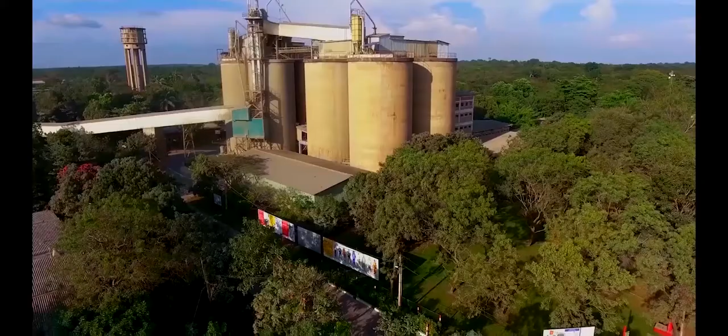INSEE is a proud member of the Siam City Cement Group Public Limited, a leading cement manufacturer in Southeast Asia. The Siam City Cement Group provides world-class construction materials to a host of countries around the world.

This includes Cambodia, Bangladesh, Vietnam, Thailand, Indonesia and Sri Lanka. With a plethora of landmarks and buildings that define the skylines of these countries, the Siam City Cement Group pledges to be a role model in corporate governance and sustainable development.

INSEE Cement, Sri Lanka's premier cement manufacturer, is the brand behind our country's leading cement products and the driving force behind making Sri Lanka more sustainable.

With a reputation built on outstanding performance in the quality of our products, unparalleled customer service, the dedication of our employees, our respect for the communities in which we operate, and our ambition to set the standards for the industry of tomorrow, we have contributed to the growth of Sri Lanka with iconic developments across the island.

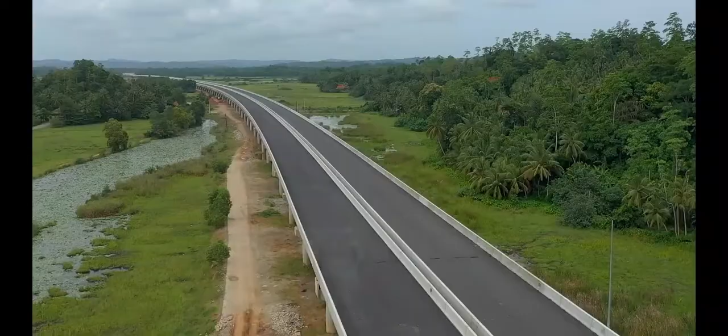Just to name a few: the Lotus Tower, Altair Residencies, the Colombo South Harbour, Southern Expressway, Mattala Airport, the Kalladi Bridge, the Kotelawala Defence University, Mahinda Rajapaksha International Cricket Stadium.

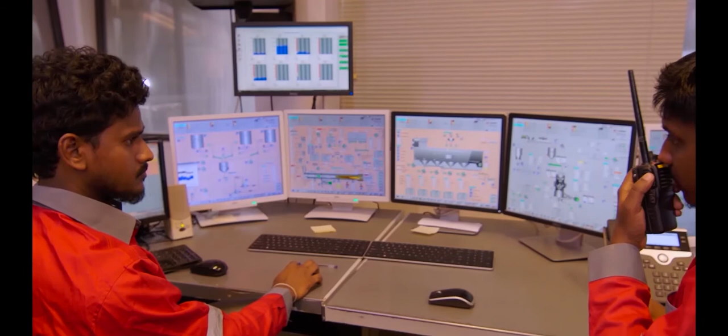INSEE has cemented its position as the most preferred local manufacturer of cement in Sri Lanka, with its widespread distribution network comprised of over 7,000 dealers in the retail segment located island-wide. Today, we have 2 plants in Puttalam and Galle and 2 terminals in Galle and Colombo.

INSEE's Sunstar brand is Sri Lanka's first cement product to be awarded the Green Labelling certification by the Green Building Council and was the first blended cement to launch in Sri Lanka.

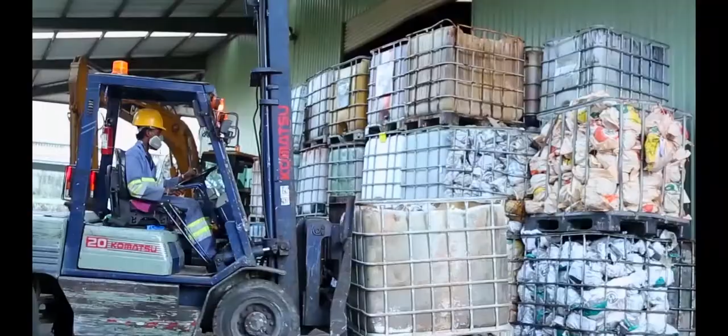INSEE has a wide portfolio of cements and services to suit all your construction needs. The most popular among them: INSEE Sunstar, INSEE Mahaweli Marine Plus, INSEE Extra for mass pouring concrete, INSEE Rapid Flow Plus, INSEE EcoCycle, INSEE Concrete, Conwood by INSEE, and a state-of-the-art innovation and development facility.

Having been a part of Sri Lanka for almost a decade, we will continue to build on our long heritage of shared loyalty, creating trusting relationships with our business partners, people and community, and delivering our promise of building the nation.

Today's session, as Dishan said, is about the new SLS 1697 Portland composite cement.

And the third thing is that today Switzerland is playing the quarter-final against Spain, such a small country. Thanks to discipline, thanks to motivation, they could do it. That is exactly the same when it comes to innovation. When we have the right ingredients, as in Sri Lanka, impossible is nothing for us.

That is why I'm really grateful to have this opportunity to present you the new SLS standard on Portland composite cement.

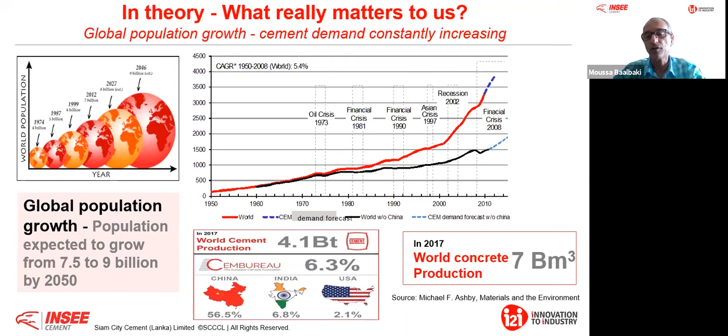But today there is huge pressure in terms of carbon footprint, I will come back to that. Looking at world concrete production in 2017, it was around 7 billion cubic meters. Sri Lanka alone is around 12 million cubic meters poured last year. There is really intensive use of cement and concrete to sustain development in every country, including Sri Lanka.

It is important to mention that cement is the third largest CO2 emitter after fossil fuel and land use. The cement industry alone contributes to almost 8% of global CO2 emissions and climate change.

This is really tremendous. When we look at the embodied carbon of building products and construction, they are responsible for 11% of global greenhouse gas emissions, and 28% of the global building sector emissions. The footprint is quite impressive.

Eliminating this emission is key to addressing climate change and meeting the Paris Climate Agreement target that Sri Lanka has signed. For every ton of OPC, we are emitting around 0.8 to 1 ton of CO2, so the footprint is quite high.

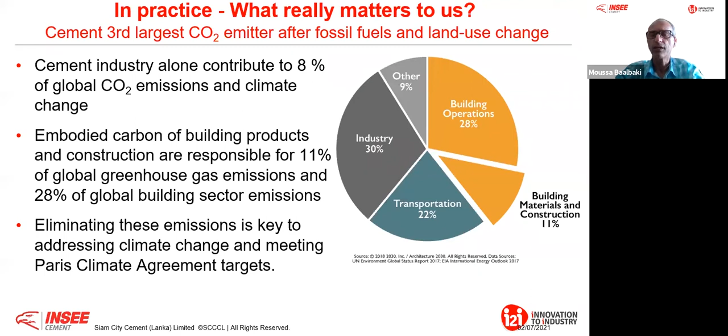But what is also important to mention is that embodied CO2, compared to operational carbon emission, is very important here, because it is locked in place as soon as a building is built. We have to address this.

When we talk about operational carbon, we see today solutions during the use phase of a building, using more green energy, non-fossil energy, electricity coming from solar and wind. There is a lot of improvement there.

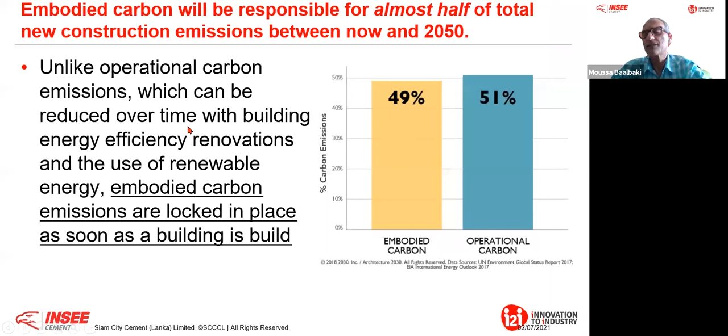But when it comes to embodied CO2, it is very important that we look at the product as it is during production, mainly cement. If we do not achieve a 65% reduction in total global emissions by 2030, we will have lost the opportunity to meet the 1.5 to 2 degree threshold for climate change. That will be irreversible, so we have to really look at this.

That is why most of the big cement player companies, even in our region, have already committed to 2030 and 2050 roadmaps for CO2 reduction. We need to have an immediate focus on embodied carbon reduction.

How do we do this? Through circular economy and innovative greener products. We move totally out of the linear economy to the circular economy, looking after any byproduct and integrating it into solution development, along with carbon capture and usage, carbon sequestration, and alternatives to fossil fuel.

For example, when we produce in Puttalam, we use alternative fuel, but we can also use solar energy and wind energy to reduce the footprint. There are solutions, but the most effective one is to reduce the clinker factor of the product, because clinker emits more than 60% of the total CO2 per ton of cement. That is really important to look at.

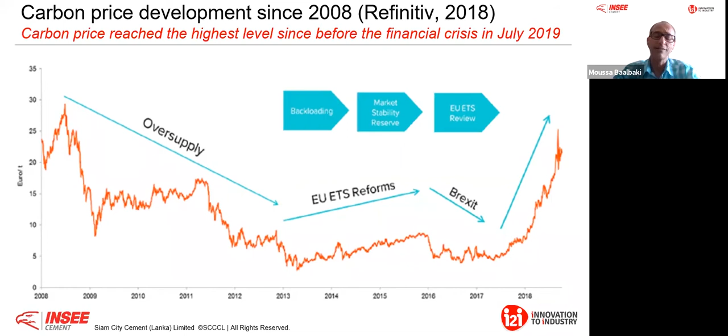Therefore, that is something that we just cannot afford. That is why we need to prepare. We have a good roadmap. We need to prepare ourselves in order to stay competitive and try as much as possible to develop solution technology, even proven technology that has been used elsewhere, and try to bring it to Sri Lanka. That is very important, and it's also a good incentive for the Lanka cement producers to invest, develop innovation, and develop the next generation to take over these challenges and turn them into opportunities for Sri Lanka, as several countries have already started.

Now, the second challenge that really matters to us is the trend toward urbanization. We say population growth, we need to build more, but when you talk about urbanization and mega cities, we build differently. We are not building only horizontally, but vertically, and even underground today. Therefore, the technique of construction and engineering properties are changing, because we are getting closer to coastal areas. People develop more, especially on an island, we need to be close to the sea. This has another impact, because we have to consider the new engineering properties requested to assure that we build in a sustainable way.

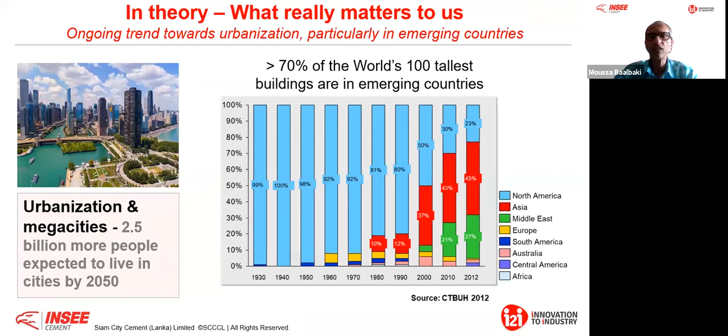For example, if I look at tall buildings built vertically over the last 50 years, more than 95% were built in North America. Today, more than 70% to even 80% of the world's 100 tallest buildings are in emerging countries, meaning Asia and Middle East countries. This is why we build so much vertically, and this has an impact in terms of technique and solution development to assure that we can fulfill engineering properties. For example, when we talk about e-modulus for tall buildings, or durability for infrastructure that needs to be built now for 50 to 100 years, these aspects are not linked to compressive strength alone. There are other properties, and that will have an impact.

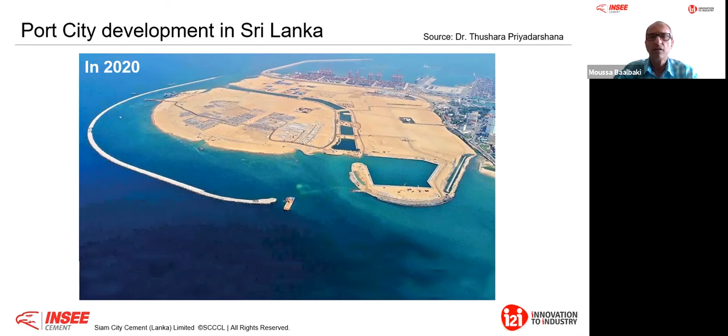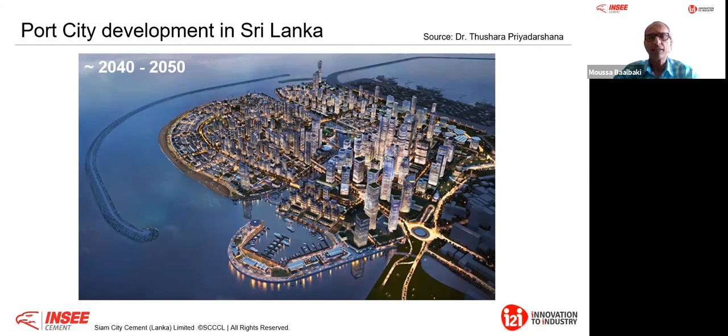Therefore, we are really challenged by supply chain and raw material. We cannot miss any opportunity to assure that we can build in a sustainable way. When I say sustainable, we build with very low social cost. That is important, because we talk a lot about concrete being the universal construction material, but also a possible universal construction problem. You have all been listening to the news. We don't want this to happen to us.

The Morandi bridge in Genoa, Italy, 2018, and in 2020 again another bridge in Italy. I don't want to show the picture of the last building collapse facing the Atlantic Sea in Miami, because they haven't finished investigating it, and out of respect for the families involved I decided not to show this picture. But here again, if we build and do not consider parameters other than compressive strength that are directly linked to exposure conditions, something could turn against our benefit. That is why it is very important that we look at this. There are opportunities, there are solutions, and this is what I would like to share next.

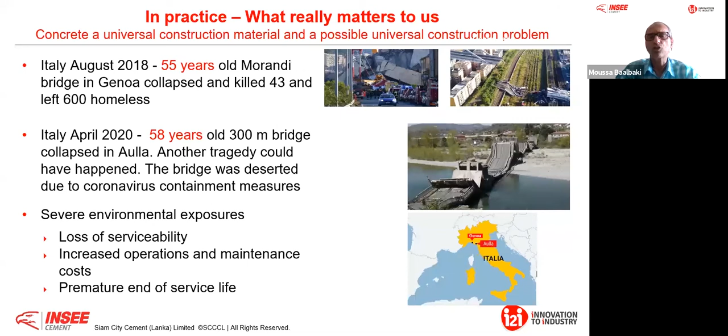Therefore, we need to move away from this prescriptive way of building, where mix design is the most important thing and we cannot change the mix design. After that, everything is based on compressive strength. If we comply, it is accepted and we build. If there's a problem, we have to repair, and this results in a high social cost.

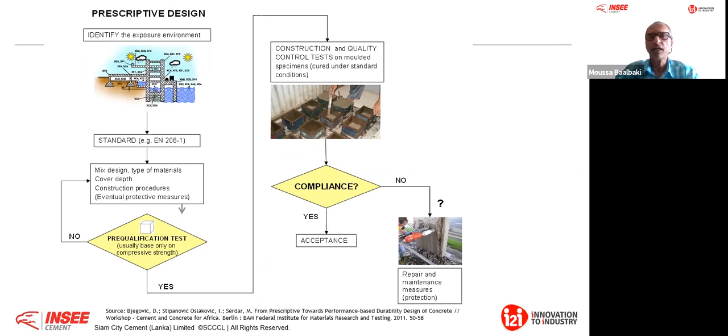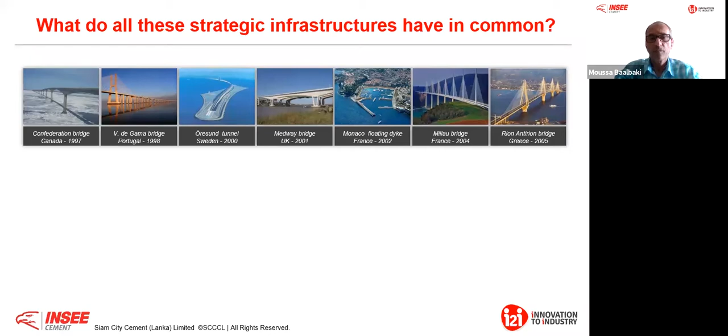We know that in the last decades, when we look at infrastructure projects, very strategic projects, they have been built to last over 120 years using durability indicators and composite cement, none of them with OPC. There are very good reasons, because those bridges are not designed considering only compressive strength. They use performance-based design, where compressive strength and indicators like porosity, chloride, sulfate, and heat are integrated into the service life model to get compliance and go for construction. That is when we come to sustainable performing concrete and composite cement, superior blended cement. That is the main reason they have been used successfully, with proven technology.

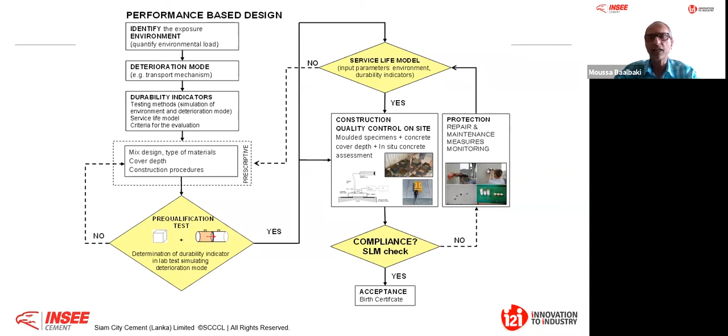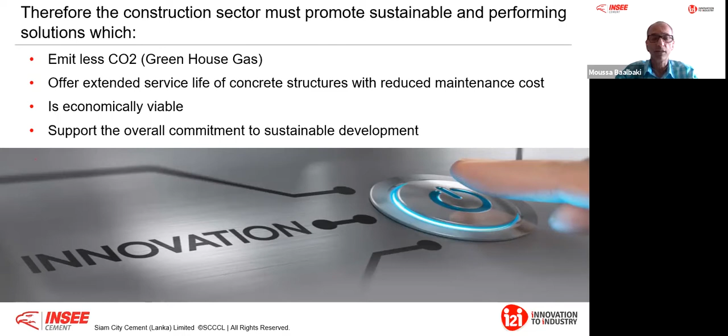Therefore, it's really time that we push the button on innovation. There are solutions. Sri Lanka has not only the capability, but also has today the projects that need this push on innovation. We have to look at products that are sustainable, emitting less CO2, less damage to the climate, that offer extended service life, with reduced maintenance costs and are economically viable. We cannot afford to pass high costs to the end user. Imagine if you had to increase the bag of cement by 100 rupees - this cannot be. We also need to support the overall commitment to sustainable development, not only as a cement industry but to support Sri Lanka to fulfill its commitment towards sustainable development, especially the Paris Agreement.

Now I come back, this is just to introduce the topic. What is the motivation? I'm talking here mainly on two aspects: the global climate change impact due to CO2, and population growth. We are on an island, therefore we need to be independent, so we need to develop solutions, and we need the right standards to push the button for innovation. That is why I want to introduce this new Sri Lankan standard, SLS 1697, the Portland composite cement. It's called Portland because all the green products, their ancestor is OPC - of course, they are all Portland based.

Now, to give a little framework of the standard: it has been approved by the sectorial committee on building and construction on the 24th of February. So today, cement producers can produce such a product and sell it in the Sri Lankan market. Second, this standard has been prepared to enable manufacturers to produce Portland composite cement equivalent to OPC Portland cement on the basis of compressive strength at 28 days. As you know, in Sri Lanka we have 32.5, 42.5, and the cement industry is offering 42.5, either N or R. Therefore this SLS 1697 will be equivalent to this compressive strength for OPC.

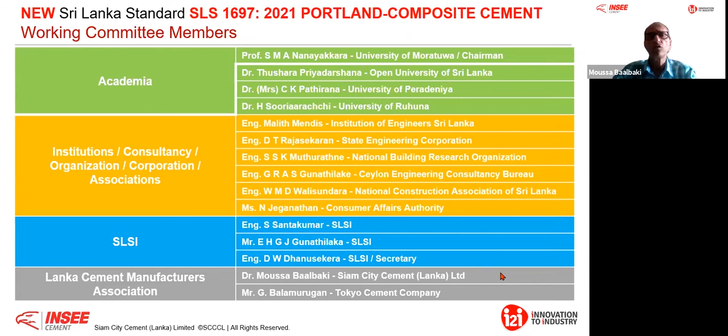We also have members from institutions, consultancy organizations, corporations, and associations who were sitting in this working committee, plus SLSI, and the Lanka cement manufacturers - Siam City Cement and Tokyo Cement. This was the working committee. Also from the sectorial committee for cement and construction expertise, we have Professor Ranjith Dissanayake, senior lecturer at University of Peradeniya, who is also present today for the panel discussion. Thank you so much. And also Engineer Magala De Silva, SLSI board member from Synergo Consulting. Thank you, Engineer Magala.

He is also going to participate in this panel discussion after my presentation.

This is really something great, because this is like the Swiss team. It's a winning team because it represents all stakeholders, from construction, from the private sector, from the public sector, from the consumer, from academia, that this standard has been developed. I think that is really a great achievement.

Now, when it comes to composition and notation, let me go fast through a summary. You probably know our standards in Sri Lanka, but just as a refresher, we have the British standard, the EN197, with 27 products, what we call common product, and also 7 products which are sulfate-resistant common cement.

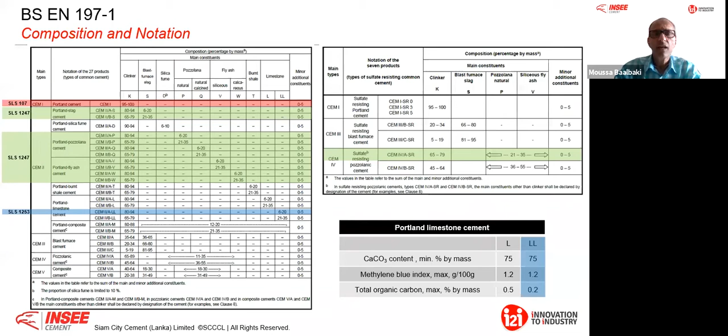Now, if we look at the 3 standards we have today in Sri Lanka: we have the SLS 107, the same as EN197, the OPC. Then we have the SLS 1247, the blended hydraulic cement, also derived from BSEN 197. After that, the Portland limestone cement, SLS 1253, also derived from BSEN 197. And now we have this new standard, the SLS 1697, the Portland composite cement.

This is a cement that we just took out of a box from BSEN 197, because it was time for Sri Lanka to move toward a solution that could help the industry turn these challenges, as I explained at the beginning, into an opportunity. So this is not a development that we have done in Sri Lanka - it has several decades of proven technology application, which I will share at the end of the presentation.

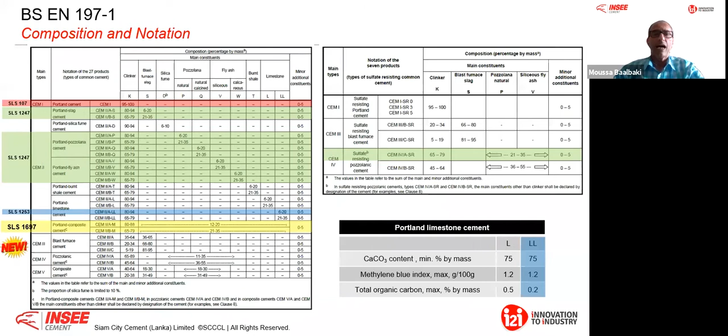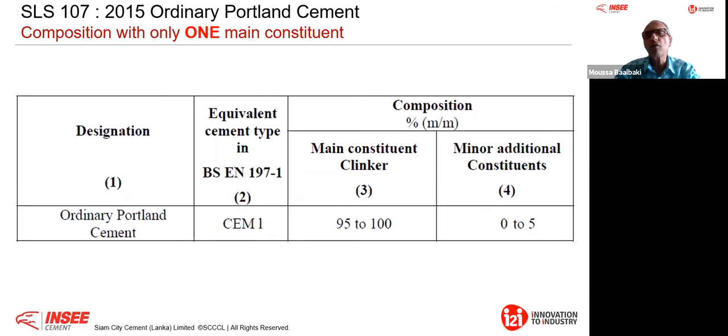Now if I come to the composition: for the OPC, the main constituent is only one, clinker. So in OPC we have clinker and what we call a minor addition, 0 to 5%. Now when we come to the 1253, the Portland limestone cement, here you don't have one constituent, but two main constituents.

Clinker and high-grade calcium carbonate, what we call limestone, the LL class - this is high grade. You also have here the minor addition constituent, 0 to 5%. So now we have 2 constituents.

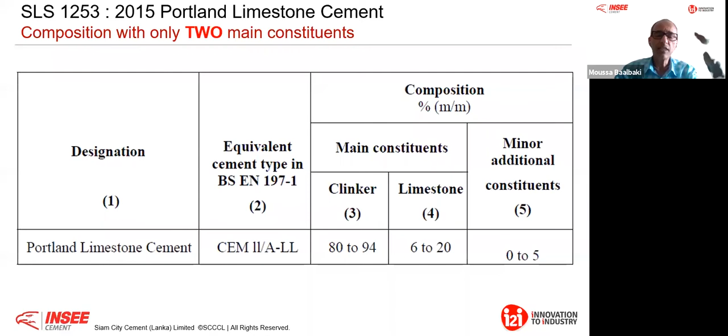Now when we come to the SLS 1247, here you also have 2 main constituents: clinker, and either pozzolana - natural or calcined - or granulated blast furnace slag, what we call slag in Sri Lanka, or fly ash, either silicious or calcareous, but in Sri Lanka we mainly use silicious.

So these 2 main constituents mean you mix clinker with one of them: either clinker and natural pozzolana, or clinker and calcined pozzolana, or clinker and slag, or clinker and fly ash. For example, looking at the products of INSEE, formerly Holcim: the OPC will be the RF, the Portland limestone cement will be the Sanstha. If I take a slag base, it will be RF Plus or Marine Plus - that's slag based. We are also producing in Puttalam the F class, the Extra or the Marine Plus or the Alpha, which is fly ash based. So the 2 main constituents are clinker with one of these additions.

But now when you come to the new SLS 1697 Portland composite cement, the constituents are exactly the same - we have clinker, pozzolana either natural or calcined, slag, fly ash either silicious or calcareous, and limestone. So all the constituents that are in the OPC, the Portland limestone cement, and the blended hydraulic cement are exactly the same in the Portland composite cement.

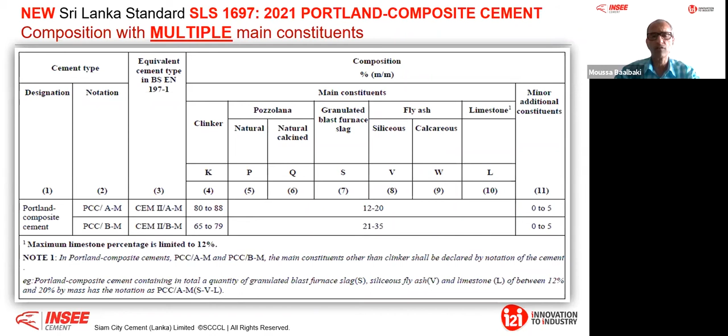For the Portland composite cement, you start at 12%, and you always have this minor addition of 0 to 5%. Therefore, in terms of constituents, there is nothing we bring that we have never used in Sri Lanka. The constituents of Portland composite cement are exactly the same, but in Portland composite cement you have multiple main constituents. This is just the difference.

Now I have talked about how to mitigate the CO2. How to mitigate CO2? I mentioned the clinker factor. The clinker factor is really important here.

If I look at the first year of publication of these standards, the OPC was published first in 1971, where the carbon footprint is around 1 ton of CO2. After that, it took almost 30 years before blended cement, either Portland limestone cement or blended hydraulic cement, came with this standard in 2003. So we had 30 years where our engineers' experience was built on OPC. But you agree with me, during that period, blended hydraulic cement, Portland limestone cement, and Portland composite cement were already developed and implemented in several countries. And that is what I will show you.

When it comes to the footprint, with Portland limestone cement we can reduce the clinker up to 20%, so CO2 can be reduced up to 20%. With the blended hydraulic cement and the new Portland composite cement, I can reduce the clinker up to 35%, therefore reducing the CO2 footprint up to 35%. This becomes very significant.

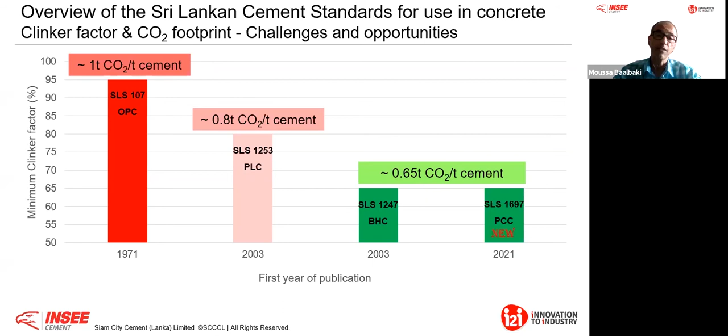Now, the difference between them: if I take the Portland limestone cement and the blended hydraulic cement, I have only one type of mineral addition, either limestone, or slag, or fly ash, or pozzolan. With the new Portland composite cement, it's a multiple blend. That is good, I would say, because this pushes the bottom line of innovation and lets us look for opportunity.

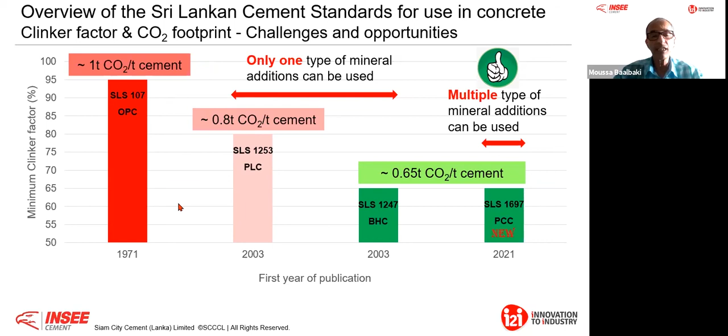For example, on the pipeline today, if I look at our R&D activity, we are investigating a new aluminosilicate material in Sri Lanka, to develop it and start producing cement based on it. Therefore, we'll be improving our import footprint, let's put it like that. That is a good incentive, and this is the best way that we grow our capability and continuously develop ourselves to be ready for any new innovation that could be implemented in Sri Lanka.

Now I would like to talk a bit more in depth about Portland composite cement production. It has what I call a complex mineral system. What is this complex mineral system? When I look at all the ingredients used today in our 4 cement standards, they are all within this ternary chemical composition of calcium, silicate, and aluminate.

This is complex because not every slag is slag, and not every clinker is clinker. Clinker depends very much on the raw material used to produce it, and on the process being used. It's the same for slag. Slag is a byproduct, not from the steel industry itself, but from the iron cast that is produced to make the steel. Therefore there is a byproduct called slag.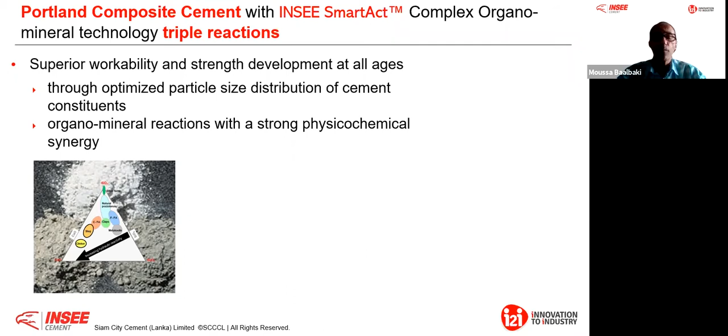At the same time, if we combine the chemical part to the physical part, we are able to have a very strong physico-chemical synergy. I'll explain it later.

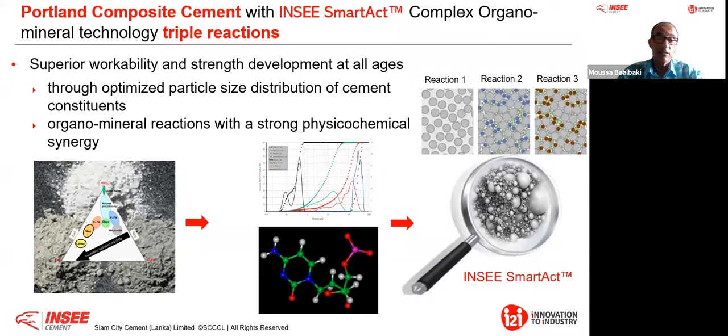That is important because when you move from normal concrete to high performance concrete, it's not only about compressive strength - you achieve that through the water cement ratio to a certain extent. But if you look after the porosity of concrete, you can have two concretes with the same compressive strength, but one has higher permeability than the other. That's exactly what I'm talking about with the triple reaction - how this triple reaction with Portland composite cement is the main reason why bridges and big infrastructure worldwide, buildings, they all use this type of Portland composite cement.

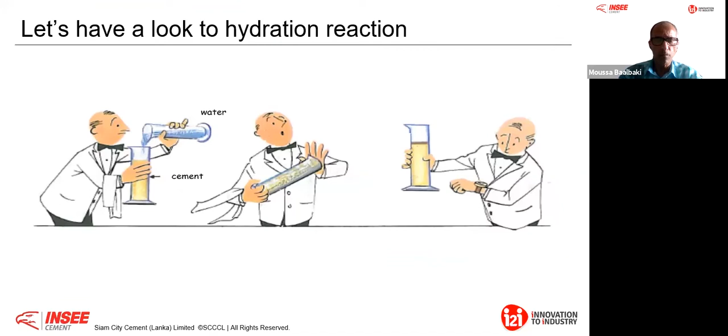Now, let's look at the hydration. Some of you know some of my slides, because now I'll dig a little bit more into Portland composite cement. Let's have a look at the hydration reaction.

If I take, for example, the SLS 107 - this has one constituent which is clinker, with minor addition below 5%. Of course all cement is regulated with gypsum. So mainly it's clinker that reacts here. When you add water to clinker, you have a hydration reaction that forms two main products: the first is calcium silicate hydrate, and the second is portlandite, or calcium hydroxide. Let's call it portlandite.

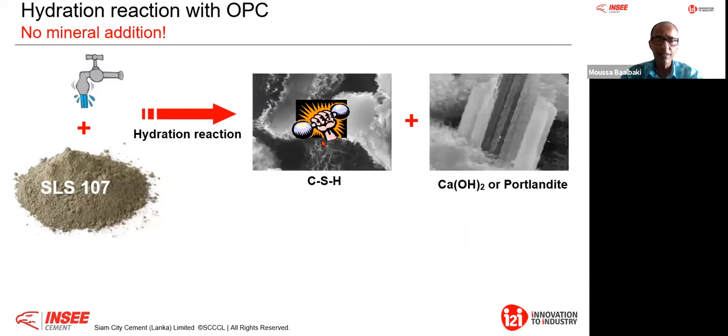Now, as an engineer - I'm not a chemical guy, I'm a civil engineer - what's important for me to know is that whenever I have good performance, strength, durability, this is thanks to the calcium silicate hydrate. Whenever I have weakness or issues, this is coming from the portlandite, because it's a soluble salt - if you dissolve it, you can get carbonation, acidic attack. I'll explain it later. That's why it's really important - in the past, mix designs were sometimes rich in cement just to assure they had developed enough CSH. That's the main reason.

When I look at this SLS 107, you have one reaction that produces a very good product called calcium silicate hydrate, as you can see in this microscopic picture from the scanning electron microscope, and portlandite. You see already in terms of size how portlandite is a very big crystal, a very soluble salt crystal, compared to the CSH which is more at a nano size. This shows there's already a big gap.

Like in concrete, you have a big gap. When you look at the constituents of concrete, the smallest one, cement, is about 20 microns. If I take the coarse aggregate, it's 20,000 microns - you agree with me? From 20 microns to 20,000 microns, how do I mix this to keep a certain cohesiveness? This is why packing - maximum packing and development of hydrated products - are important.

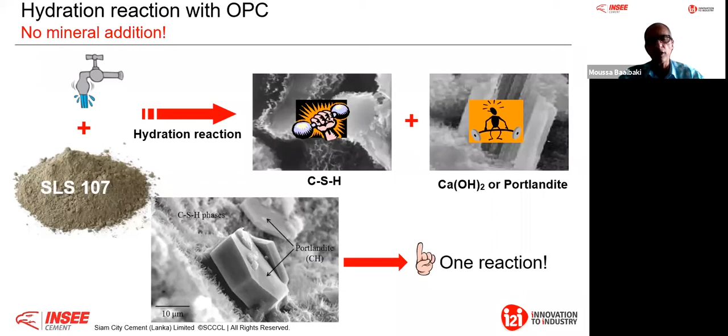Otherwise, you can lose the cohesiveness, and have some issue in fresh or hardened concrete properties. Therefore, now when I come, for example, to the...

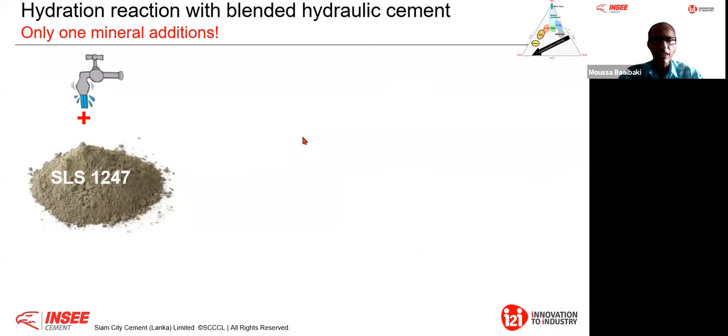blended hydraulic cement, the 1247, the same I have clinker. If I mix this cement with water, I will get the same reaction with calcium silicate hydrate and Portlandite. One will give me strength, and one will give me the problem, the challenge. Now, of course, in this cement I have the aluminosilicate material, like fly ash, like pozzolana, like slag. So you have SiO2, and this SiO2 will combine with the calcium, giving a second reaction called pozzolanic reaction. This pozzolanic reaction will turn the Portlandite, which is the weakness in concrete when it comes to durability, into strength. And suddenly you are mitigating the problem with Portlandite.

If you go and ask Port City why they go exclusively with fly ash cement INSEE Extra, that is the reason. I will explain you later. That is the main reason.

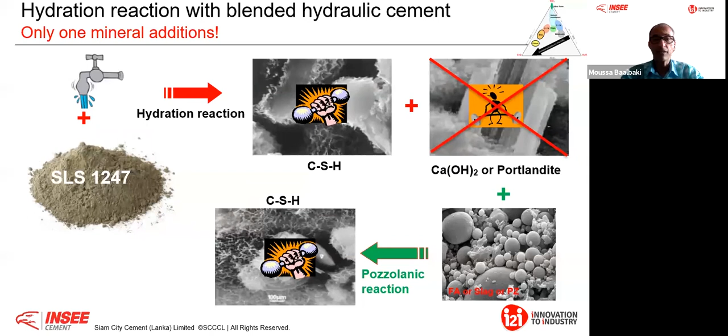Therefore, it's not about megapascal. It's about to which extent I can increase the calcium silicate hydrate to have a mature concrete where capillary pores are not percolated, and I'll explain later where you have the minimum of these capillary pores. Therefore, you need to have a glue, but a good quality glue.

In this cement you have two reactions. That is why if you test blended hydraulic cement at 28 days, then 56, 91 days, 6 months, up to 1 year, we have a lot of data we can share with you. You see that the strength is just keeping going and going. You develop a concrete at 40 megapascal, you end up after 1 year with 80 megapascal. The additional strength, indeed, you don't need it, but you need it to self-heal, to secure your concrete bridge

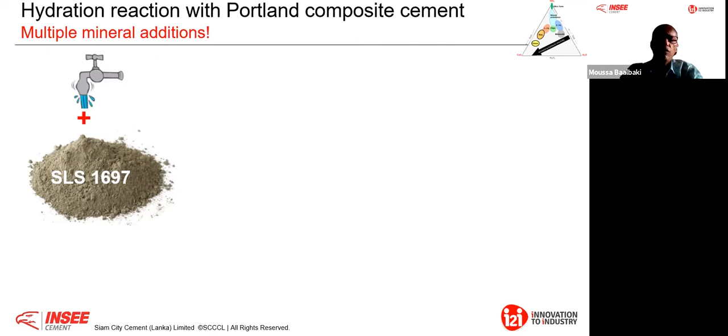or your concrete road or your balcony or whatever you build for durability regarding this exposure condition, especially when you have reinforcement. Now, when I come to the SLS 1697, here you see we have multiple mineral addition. It's not 2, we can have 3, we can have as much as we have on the table. Now here you have clinker, therefore again you have the same reaction with the two products, giving you strength and weakness. Of course, we have one constituent, for example, could be slag, another constituent could be fly ash. This has, as I said, aluminosilicate, therefore you have the SiO2. This SiO2 will combine with the calcium, again from pozzolanic reaction, you get more strength and you mitigate the weakness. But it's not finished, because you remember what I told you.

If I look at OPC, Portland limestone cement, blended hydraulic cement, the second constituent, for example in Portland limestone cement, I can put slag or fly ash, but it's minor, less than 5%. If I go to blended hydraulic cement, like fly ash cement, I can put limestone or slag, but this is minor, below 5%. They are not main constituents. But in the Portland composite cement, they become main constituents. Therefore, if I add high-grade calcium carbonate to the slag, or I add fly ash to the high-grade calcium carbonate, I have a third reaction that will take place.

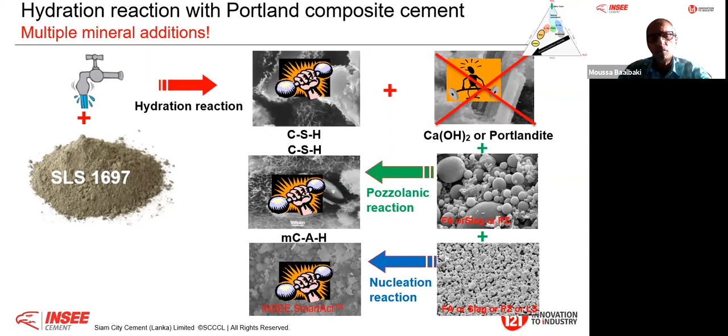Because, you know, I said aluminosilicate, the silicate is forming with the Portlandite this pozzolanic reaction. But what to do with the aluminate? For example, if I put high-grade calcium carbonate, I can dissolve calcium. The calcium will combine with the aluminate that is in the slag or in the fly ash that we did not use, to form what we call another reaction, the nucleation reaction, that will form the MCAH, what we call monocarboaluminate. That is giving you more strength, this is the additional strength. That is why, even though you are reducing your clinker factor, you are producing more or equivalent high quality hydrated product or glue. That makes a big difference.

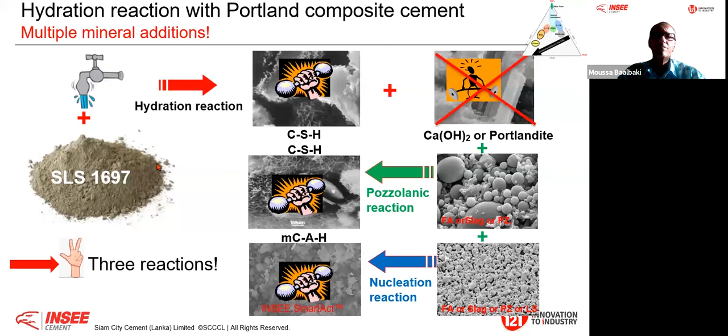And in this case, when we look, we have now three reactions. This is a triple reaction. Therefore, we are fully taking advantage when I look at calcium silicate hydrate plus activation system, pH plays a big role. We are able to fully take advantage of this main constituent of the Portland composite cement. That is why if you look in terms of hydration, what we call the hydration mechanism, this is what we call pore blocking, or developing high strength.

What is this pore blocking? Very often you have heard us talk about capillary pores, percolated capillary pores. When you do a water permeability test, you ask yourself why water can go through your concrete, because you have a connected porosity.

With a triple reaction, you increase the calcium silicate hydrate that leads to higher strength and also to pore blocking. Why pore blocking? Because even though you have a certain porosity, it is not percolated anymore. That is why a gas or liquid cannot go through it, which reduces the permeability and therefore the durability of the concrete.

Schematically, if I take a cement grain, in the hydration reaction you first have calcium silicate hydrate, that is the strength, that is good. But you also have porous calcium hydroxide, the Portlandite, which is soluble. Therefore, if you have different cycles of wetting and drying, you can see white staining on the surface of your concrete. This comes exactly from this Portlandite.

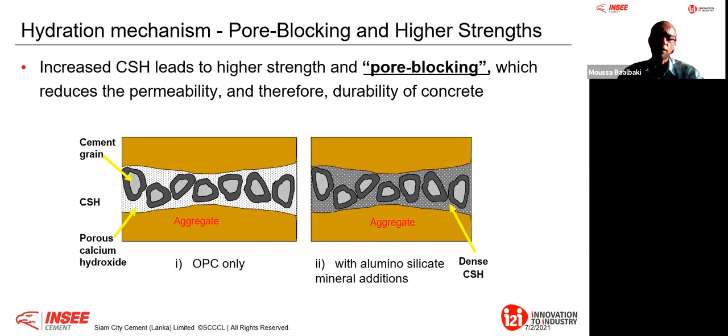Now if I mitigate this Portlandite by adding the silicate or aluminosilicate material in the Portland composite cement, I can densify it by forming more calcium silicate hydrate. And suddenly, thanks to the aluminosilicate constituent you put in your Portland composite cement, you can further improve the durability of your concrete. At the same time, I will show later, when we move from normal concrete to high performance concrete, we have what we call the transition zone.

The transition zone is about how the glue, the quality of the cement hydrated product, bonds with the coarse aggregate. That is also very important. This is what we call the wall effect. How can I increase the bond in the wall effect?

Because if you take normal concrete and break a cube of it, as I will show you later, you will see you don't break the coarse aggregate. It goes through the cement hydrated paste. Therefore, if you go to high performance concrete, to better quality concrete, you need to develop this wall effect, you need to increase the bond.

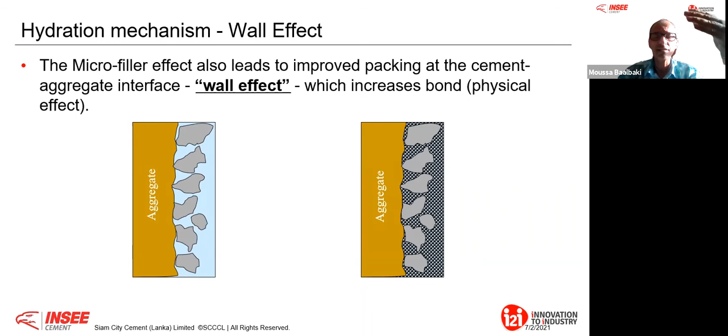How you increase the bond is to take out the Portlandite, the calcium hydroxide, and turn it into what we call calcium silicate hydrate. That is really important. That is why we have this physical effect, where you can highly improve the compressive strength by having this kind of reaction.

Now, in this slide, in normal concrete, what is written here, as you know very well, is that strength is governed by Feret's law or Abrams' law, that is the water cement ratio. I'm not going to tell you more, because you know very well that if I increase my water cement ratio, my strength will go down in normal concrete.

Therefore, it's very important to keep in mind that we don't have problems very often with the aggregate, because aggregate properties are not often considered, except of course requirements regarding cleanliness and grading.

Therefore, in normal concrete, if you look at the microstructure, you see that you have high porosity and heterogeneity of the matrix. You have oriented crystals of Portlandite on the aggregate. You see how this Portlandite is oriented at the interface with the aggregate, which gives you weakness in flexural strength, E modulus, compressive strength, and fatigue.

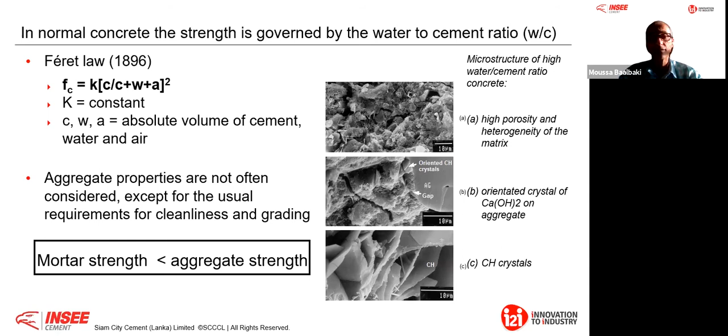If you go to fatigue, with different cycles of fatigue, you can develop internal cracks. At the same time, you will see that this mortar strength is very often lower than the aggregate strength. But when you break a cube, very often you don't break the aggregate, it goes through the cement hydrated paste.

Now, when we come to high performance concrete, high strength, this strength is not governed by the water cement ratio anymore. Here the limiting factor could be the aggregate, because to improve you have to control the water cement ratio, and you need to have a good aggregate.

That is why, if you remember the last webinar on ultra high performance concrete, the way to do it is that the inclusion of coarse aggregate is omitted in the mix design. We just take it out. That's the way you do it.

Otherwise, if you want to develop concrete up to 100 megapascals, you need to consider the role of aggregate, because the compressive strength is no longer related only to the water cement ratio like in normal concrete.

There is one important factor: the transition zone between the paste and the aggregate. If you can improve it, you improve the bond, what we call the wall effect. By improving the bond, you increase all the engineering properties, and when I say engineering properties, I don't mean only compressive strength. That is how we build bridges that last 100 to 120 years, and how we can have tall buildings where the modulus of elasticity is almost close to the E modulus of aluminium, 40 gigapascal. This is possible if we look after the coarse aggregate.

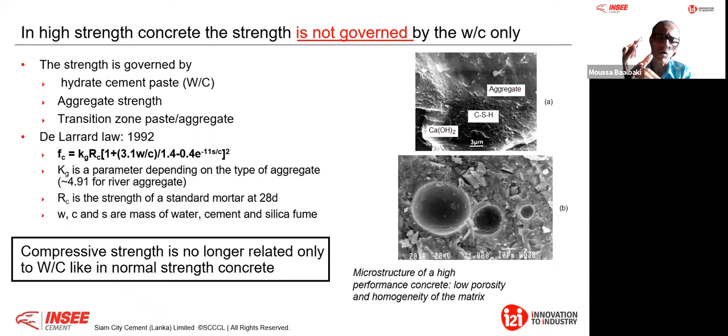The cement hydrated paste with Portland composite cement will really improve, through the triple reaction, the transition zone between the coarse aggregate and the hydrated mortar. That is important to keep in mind when it comes to durability.

That is why there is a notion, when we talk about high performance concrete, of the gel space ratio. What is the gel space ratio? It's a ratio between the volume of hydrated paste and the sum of the volume of hydrated paste and the volume of capillary pores. If you do, for example, mercury porosity, or soon with our innovation to industry collaboration we'll get the gas permeability meter, we are able to look at permeability to gas, not only to water. This ratio becomes very important, because the more hydrated product we produce, the less capillary pore we have, and therefore this ratio will increase.

By increasing the ratio, we increase the compressive strength. That is really important, that is fundamental. That is why I say that when you test, for example, blended hydraulic cement, or in the future Portland composite cement or Portland limestone cement, please don't stop at 28 days. Continue to test your concrete after 28 days, and you will see good maturity, and this good maturity will benefit the durability of the concrete, not only the compressive strength.

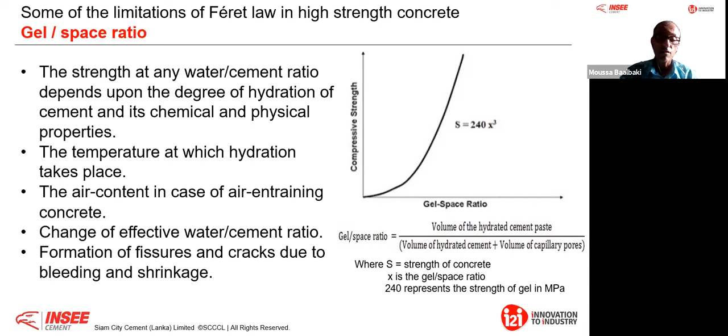Indeed, you don't need it. If you design for 30 megapascal and you get 55, why do you need 55? Why pay for it? If you pay for it, it's to have extended service life. Instead of building a bridge for 50 years, I can build it for 100 years. You agree with me? Therefore that becomes economically interesting. It's not about cost per cubic meter, but how much is the return on my investment. That's what becomes interesting. That is why high performance concrete, even though per cubic meter it costs sometimes 15 to 20% more, is still used to build bridges with service life above 100 years.

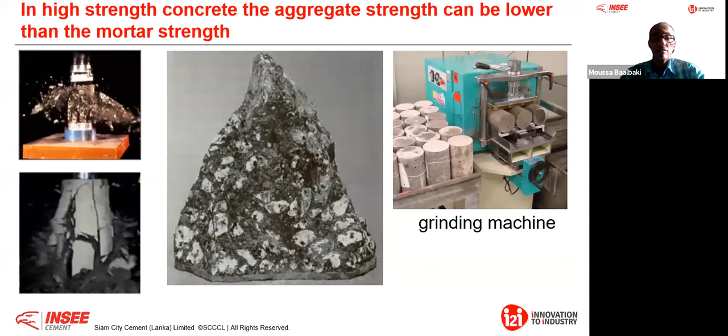If you take, for example, high strength concrete and test it in compressive strength, you see that the failure happens through the coarse aggregate, and that is the main reason. If you come to I2I, we have a grinder. In some tests for high strength, for example using cylinders, we need to prepare the surface, grinding it to assure parallelism and perpendicularity. Otherwise you have eccentricity when testing compressive strength. That is the main reason we have to adapt even the technique of testing, because the aggregate could be lower in strength than the cement hydrated product.

Now, coming to the deterioration process of concrete, we look at what we call internal origin and external origin. Given the limited time, I will discuss the external origin. In the external origin, the top one is corrosion. If you see failure, if you see concrete collapsing, it's mostly due to corrosion, mainly chloride or carbonation, or it can also be chemical attack, mainly sulfate for example. In Nordic countries you have frost, but this is not of concern for Sri Lanka. There is also internal origin, which is very important today - more and more we are discussing in Sri Lanka, for example, alkali aggregate reaction or delayed ettringite formation for mass concreting. This demands a lot of attention, as it has huge potential for destruction. Therefore I will mainly focus on corrosion and chemical attack.

Again, here, if I look at corrosion due to carbonation - if I take, for example, a microstructure of concrete, as I told you, you will have calcium silicate hydrate, and if you do not use Portland composite cement or aluminum silicate material like slag or fly ash, whatever you put in your blended hydraulic cement or your Portland limestone cement, you have plenty of Portlandite.

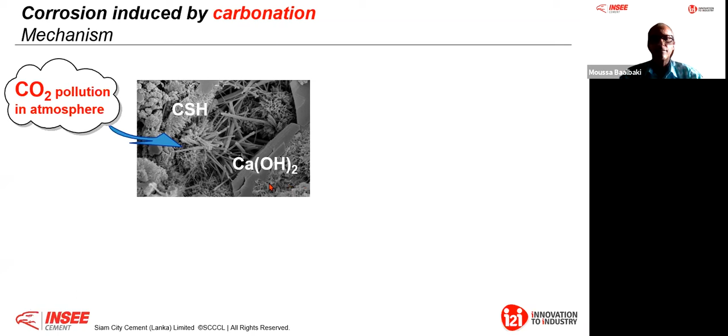But if this is continuously happening because you have high soluble CO2, high carbonation, a certain porosity - it's not about compressive strength, it's about porosity - suddenly your pH can drop. Because you have decalcification, you have more and more of this Portlandite coming out.

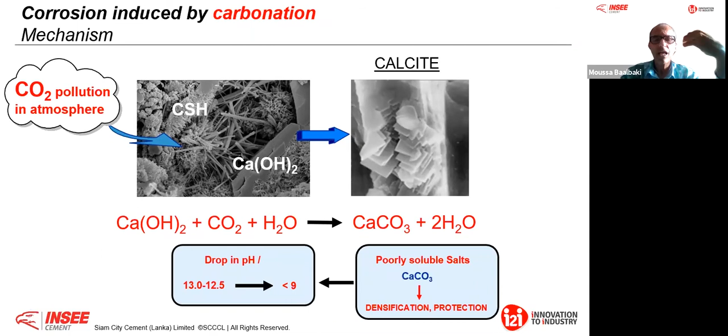As soon as your pH drops, you become more acidic, and your reinforcement gets depassivated. If your reinforcement is depassivated, it starts to grow, up to more than 10 times its volume - I'm talking about the steel bar. That is why you see rust somehow on your concrete surface. That's what you call spalling. If you see this, it means the corrosion already took place. Okay, and that is carbonation.

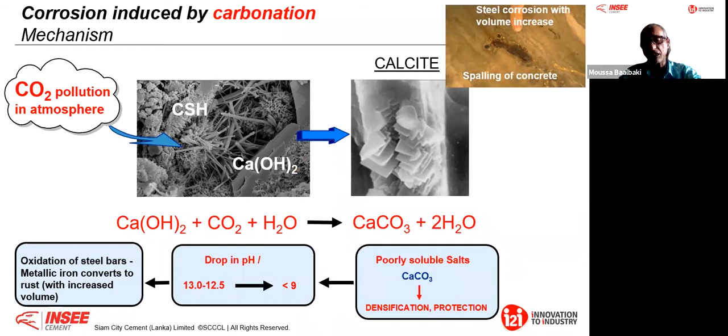the relative humidity is high - Sri Lanka is one of them - the diffusion and the carbonation is high because the soluble CO2 is high. Therefore, you have more CO2 that can combine with this Portlandite to form calcite. This is not a problem when it is in the desert, like the Sahara, or if you go to the desert in Dubai, whatever - they don't have this problem. They have another problem, but not carbonation-induced corrosion.

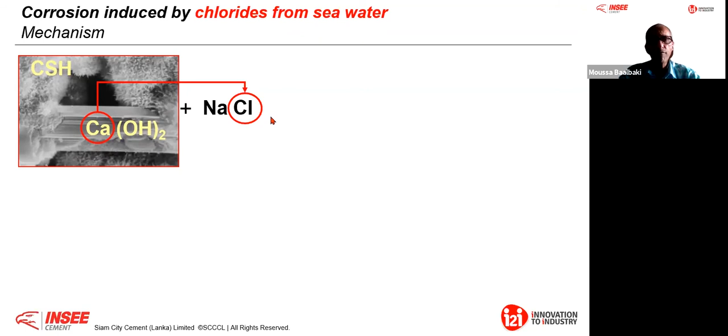Now, but in Sri Lanka, this is important - there is also corrosion coming from chloride, in marine environments. Here again, if you have chloride, it combines with the calcium in the Portlandite to form calcium chloride. If you don't master and mitigate the chloride diffusion, or ingress, in your concrete, you form calcium chloride. Suddenly, you have a pitting battery effect happening in your reinforcement and corrosion starts.

But the danger here is what? That you don't see the rust, because the reinforcement is disappearing. It's just cutting in one place. It's not the whole steel bar that is corroded. It's a battery effect. That is why you don't use sulfate-resistant cement based on clinker for marine structures.

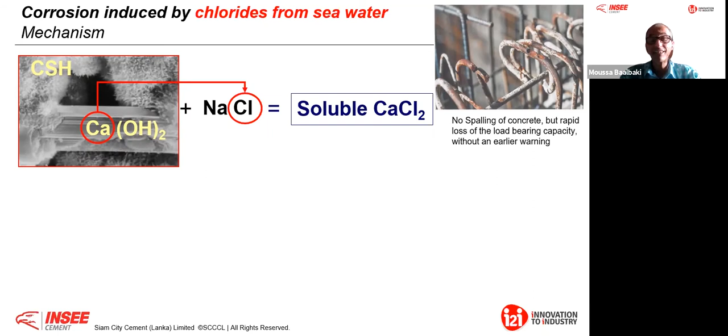Sometimes people get confused with this, but you should not use it. Why? Because you need aluminate. If you have aluminate, what happens? The aluminate will combine with the chloride to form calcium chloroaluminate. And this calcium chloroaluminate has chloride binding capacity, and therefore it reduces the chloride diffusivity. Therefore, you stop the corrosion.

That is why Port City is built with INSEE Extra, that is a limestone, fly ash-based cement. And if you look at all countries where they have marine infrastructure, they go with Portland composite cement. That is one of the reasons. You protect your reinforcement - it's not, again, about compressive strength.

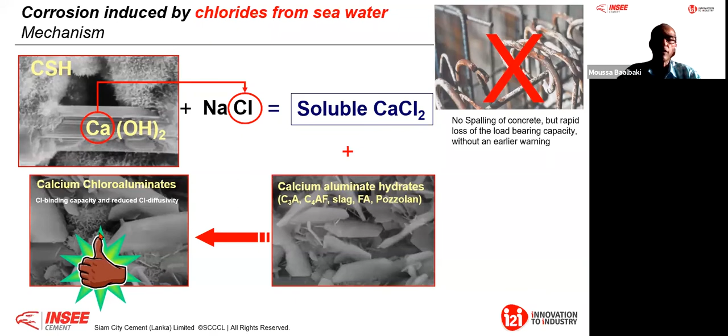Therefore, sulfate resistance is only for chemical attack due to ettringite formation. But you can use sulfate resistance based on aluminosilicate, like INSEE Extra, that is sulfate resistant, but not OPC, but blended hydraulic cement. And soon you will see sulfate resistant Portland composite cement, because you have aluminate in that cement that will combine the chloride to form calcium chloroaluminate. We call this the Friedel's salt. Scientifically that's what we call it. Therefore, that is one of the main reasons here.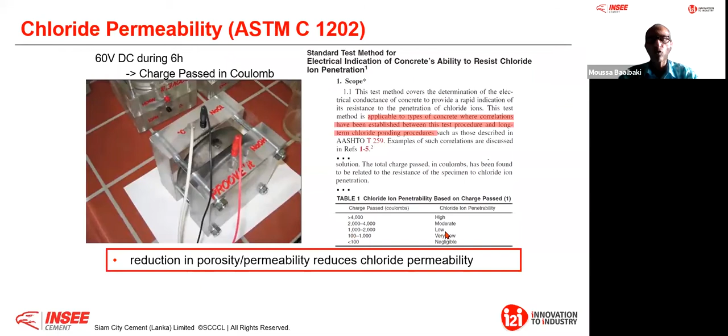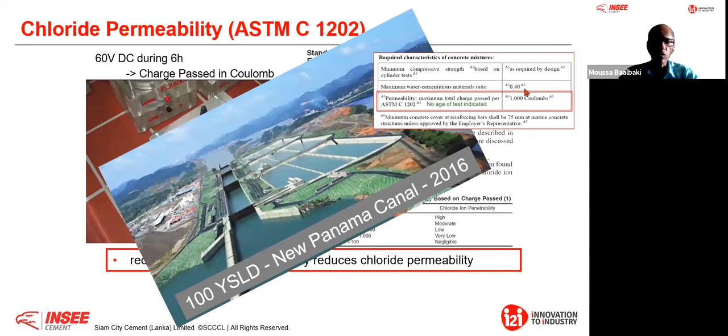And when you are below 2000 microns, 2000 coulombs, you are categorized low in terms of chloride ion penetrability. Projects like, for example, the new Panama Canal, with a 100-year service life design, where the requirement is 1000 coulombs, water-cementitious ratio of 0.4, with Portland composite cement.

We also have this test, we have it in our I2I. We also have another test that is now used more and more in Europe - the specific resistivity, what we call it - you measure the surface resistivity of your concrete. Therefore, that is what you look at for chloride ion penetrability.

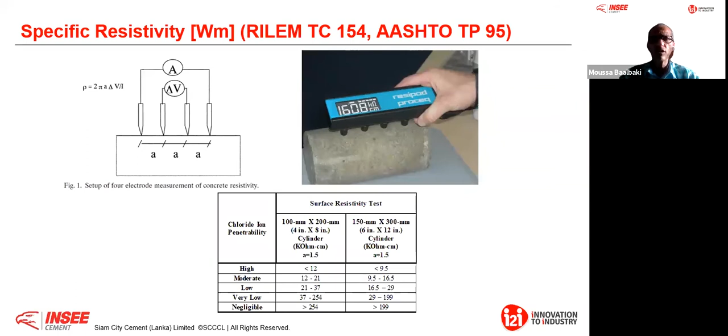Very simple test, it's a Proceq Swiss technology. We have it at I2I, and these tests will give you also a very good indication in terms of chloride ion penetrability test.

It has been used for this project in Ile de la Réunion, a viaduct in the Indian Ocean, 100-year service life design, 700 million euro. Precast, more than 95% precast on land. It's a slag base, as you see the off-white color, so you see it's not about composite again.

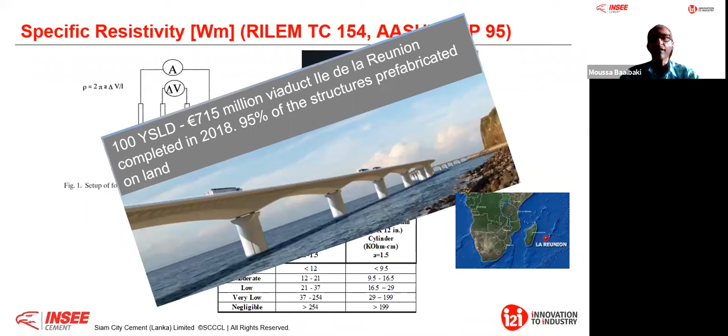Now, chemical attack, sulfate, the same. If I take the Portlandite and I have sulfate, suddenly I form secondary gypsum. And this secondary gypsum will combine, if you have aluminate, C3A for example in your clinker, you form what you call tri-sulfoaluminate, that is ettringite, and that is expansive. And that is why you have swelling, you have cracks.

Therefore, that is why if you look after sulfate resistance of OPC cement, the C3A according to the EN has three categories: either 0% C3A, 3% C3A, or 5% C3A. The ICM 150 is below 5%, this is what you call type 5 cement. But when you move to Portland composite cement, you don't have this problem anymore, because you reduce the amount of clinker, you reduce the amount of C3A, so suddenly this type of cement is also highly compatible for marine infrastructure.

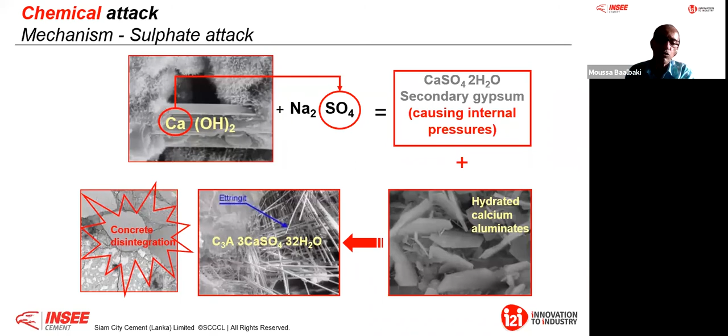Therefore, this is, for example, a personal experience I have from Canada. When I was in Canada, we developed there the legacy INSEE, that is Holcim, we developed what we call the high performance antibacterial concrete for pig farms. The problem here is with this small pig, the parasite that sits in the stable, with time contaminates the small pork. Suddenly they get sick, and the death rate can go up to 25%, and in terms of productivity this is a big loss.

Second, there are some markets in Japan, for example, ready to pay more than 15% premium if the small animal is not treated with antibiotic. This is why we call this a high performance antibacterial concrete. The way we did it is we design with Portland composite cement where we have transformed the capillarity to micropore.

Therefore, we have moved, when you do for example what we call the gas permeability test, you look and realize that your capillarity is above 100 nanometer. Above 100 nanometer, this has a big impact on the compressive strength, that is why you have to reduce your water cement ratio. And below 100 nanometer, this is the durability - shrinkage, volumetric change, or percolated gas that can come to your, or aggressive elements. That is why you need to go more to micropore.

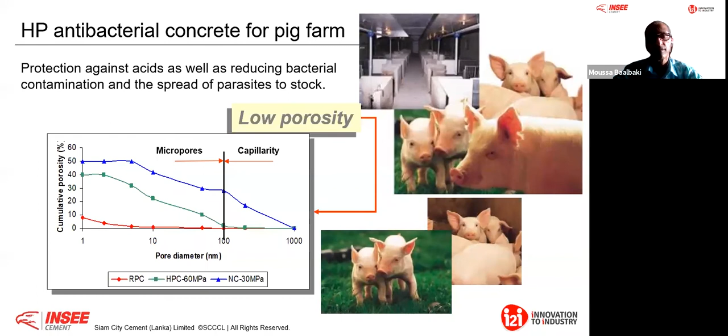Just to give you here the indicators we were looking for is low porosity, nothing to do with the compressive strength. Therefore, by using this Portland composite cement with a triple reaction as I explained, you have really high strength at all ages, denser microstructure, low permeability, lower heat of hydration because the clinker factor gets reduced, high resistance to sulfate as explained, to chloride, carbonation that prevents alkali aggregate reaction, and last but not least, the leaching.

That is very important, why I say leaching? For me, I'm more concerned with leaching for reinforced concrete. Not only for the carbonation, but the leaching for the reinforced concrete is what? I have a water reservoir, I have a certain porosity, I have a lot of Portlandite. If the water permeability is a little bit high, I can leach out the Portlandite.

So what I'm doing, by leaching out the Portlandite, I reduce the pH, therefore I have what we call a decalcification. And if the pH now reaches 9, the reinforcement is depassivated. But the problem is, if you continue to have leaching and the pH goes below 7, suddenly your calcium silicate hydrate is not stable anymore, therefore you start to lose strength.

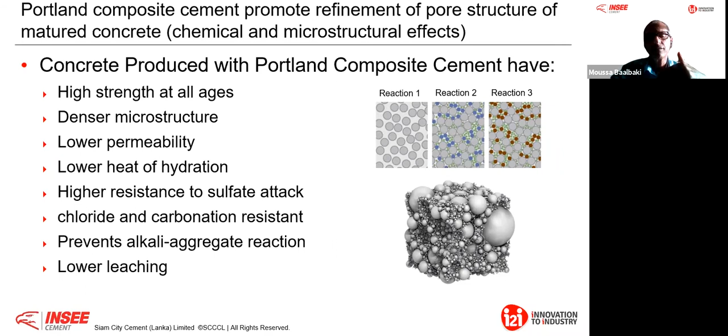That is why some water towers can collapse, some balconies can collapse - we think it is corrosion of the reinforcement. No, it's not only the corrosion of the reinforcement, it's just because we went to very acidic pH, that even your CSH, your calcium silicate hydrate that is responsible for the compressive strength by itself, gets reduced. That is really a very important engineering property.

Now, giving you some examples of Portland composite cement at international level. I've presented this slide very often just to show, for example, what the European domestic delivery in cement was, let's say 10 years back.

You see in this graphic, more than 50% is Portland composite cement. On top of that, you have pozzolanic CEM4, you have also CEM3, these are blast furnace slag cement, where the slag is above 60%. What remains as OPC is about 25%, but if you dig into it, it's not indeed 25%, because very often some ready-mix players in Europe, like in Sri Lanka, get their own slag or their own fly ash and do the blended concrete. Therefore, they use OPC, but the concrete is not OPC concrete.

What we did when we did a market discovery, we realized that less than 5% of OPC remains in Europe and is mainly used today for high-end precast, especially for some tunneling projects where demolding is after 4 hours. But the technology of this type of solution, where the cost per cubic meter of concrete can reach $300 to $350, this is niche. This is not general purpose, and this is not even something that can be considered because it is very niche. Therefore, if you look at the construction industry today, they are out of OPC. They are out of OPC.

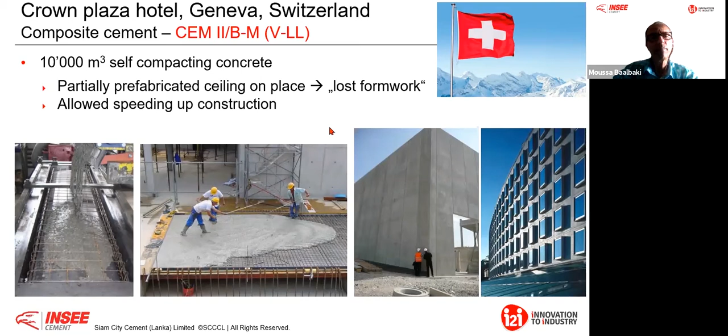Therefore, it is used for self-compacting concrete for low slump, and you see the finish, high workability, high strength in a very harsh environment - winter, and also very hot summer - successfully implemented. Also, it is used for residential and office buildings.

I can have off-white, beautiful cement with high strength, high durability. We can just put a little bit of iron oxide and turn the cement darker, but that doesn't mean the quality has changed. The color is just the iron content, but this has nothing to do with the strength. Therefore, architects use color to express a certain form of warm or cool feeling for the object.

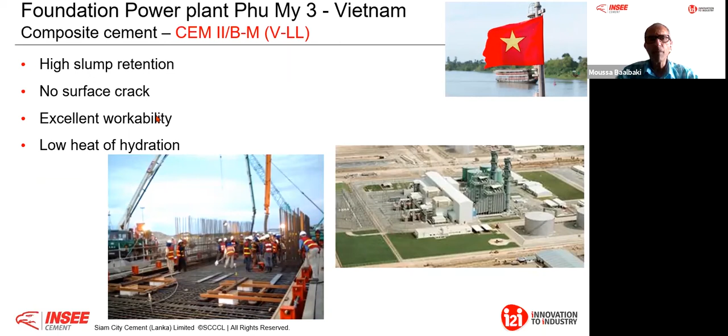In Vietnam, CEM II/B-M (V-LL), again the same - it's a fly ash and limestone cement. It is used for the foundation of a power plant, for high slump retention requirement, no surface crack, excellent workability, pumpability, and low heat of hydration.

This is in Finland. I like to present this example of how composite cement was used. This is, for example, a SLL - slag and limestone - that is the product we will produce in Ruhunu, in Galle. You see it is used to cast a bridge deck where the outdoor temperature was around 30 degrees, in summer. If you go today in Europe - even 2 weeks back in Switzerland, it was exactly 35 degrees.

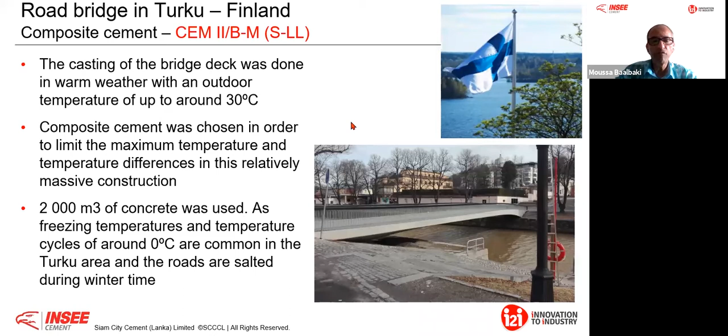But at the same time, in winter, we use icing salt to melt the snow on bridges to keep the traffic open. Therefore, you see this type of cement could withstand this extreme climate condition, which shows clearly that in terms of porosity, in terms of durability, it fulfills the engineering properties or requirements for the design of this type of bridge.

Therefore, what I want to say here is that we have proven technology. We have really great experience for more than, let's say, 2-3 decades, where we have been using this type of cement successfully in Europe. This is why they are in the standard anyway.

That is a last example where the system used composite cement with slag and fly ash. This is a water treatment plant in France. It treats around 600,000 cubic meters a day. Therefore, 50,000 tons of composite cement has been used to build 12 basins, where the depth is like a big swimming pool, 10 meters deep.

Here, the guarantee was 40 megapascal at 28 days, and also enhanced resistance to chemical attack. This is acidic attack. Therefore, that shows clearly that composite cement has been used for different applications.

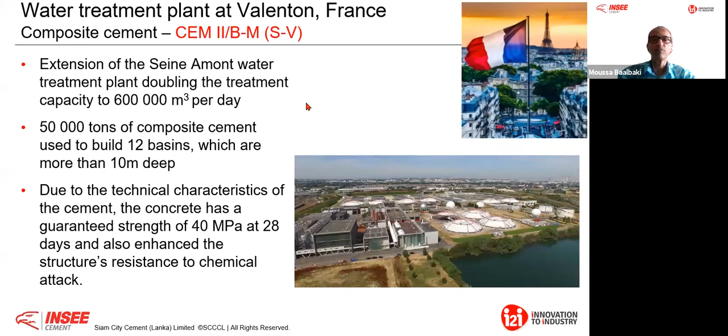Just to end up, I would like to say that this is what I call the natural journey we are taking together with the innovation, the INSEE innovation to industry collaboration space. Professor Ranjit talked a lot about circular economy when it comes to sustainability. This circular economy is the same as having a circular mindset, going out of the linear mindset where everybody does his job. But when you come to circular, we put it together.

Therefore, we can have what we call open collaboration - open in the meaning of openness, pre-competitive. We can have a lot of projects with government, customer, competitor, with supplier, with architect, with academia. That is ongoing anyway on our pipeline of activity in I2I.

Speed is very important, because we don't have to send every time our cement or our concrete to Singapore or to UK to show that we fulfill certain requirements. This can be done now in Sri Lanka. The speed is there, it's important, we cannot wait. And the connectivity - why connectivity is important.

We do not build bridges virtually, you agree with me? Therefore, it is really important that we have some harbor where everybody with his boat can go wherever he wants. But whenever he needs inspiration, he needs innovation, he needs collaboration, he just comes back to the harbor called I2I. He can put his boat there and start to collaborate, get new ideas, get inspired, and turn some of his opportunity to good business, somehow implementation.

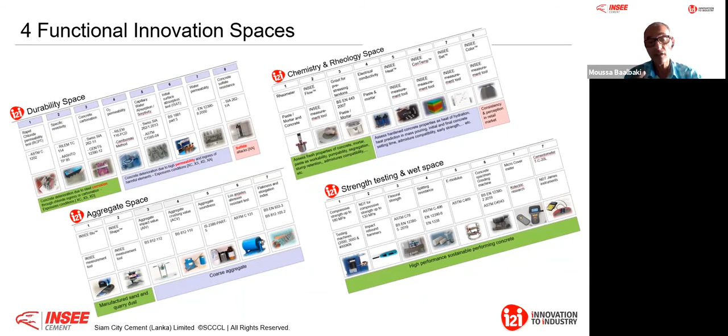Therefore, as a conclusion, I would say that over the past two decades, most international and national cement and concrete standards have introduced what I call the performance-based specification. You have seen our challenges.

If you look again, I talk about the car industry - they are switching totally to electrical. If you look at the way we build, the operational footprint is going down because people use more and more systems, new functionality for walls. They have isolated houses, very well thermally isolated. They use non-fossil energy, renewable energy. Therefore, this part of the 25% will decrease, but still the embedded CO2, that is more than 11%, that is locked down when we build, needs to be tackled.

Therefore, that is why this performance-based specification has opened and let the industry push the innovation button, to reduce CO2, to have more flexibility to optimize a mix design to fulfill severe exposure conditions. Because we just cannot afford to build bridges only for 50 years, you agree with me? I'm not even talking about the tragedy that can happen if a building or a bridge collapses.

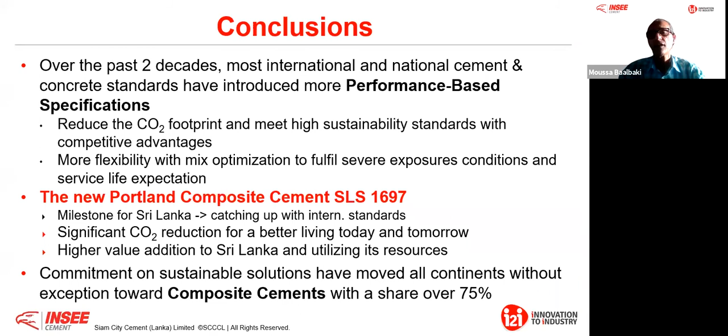If you look at domestic delivery in most countries today, you will see that the share of this type of cement is more than 75%.

Thank you so much for your attention. I hope that I could cover the topic, and somehow highlight the important parts of this new SLS 1697 Portland composite cement. Thank you so much for your attention, and I'm looking forward to your good comments, your questions, and also for the panel members to share their opinions and answer questions that come from the audience.